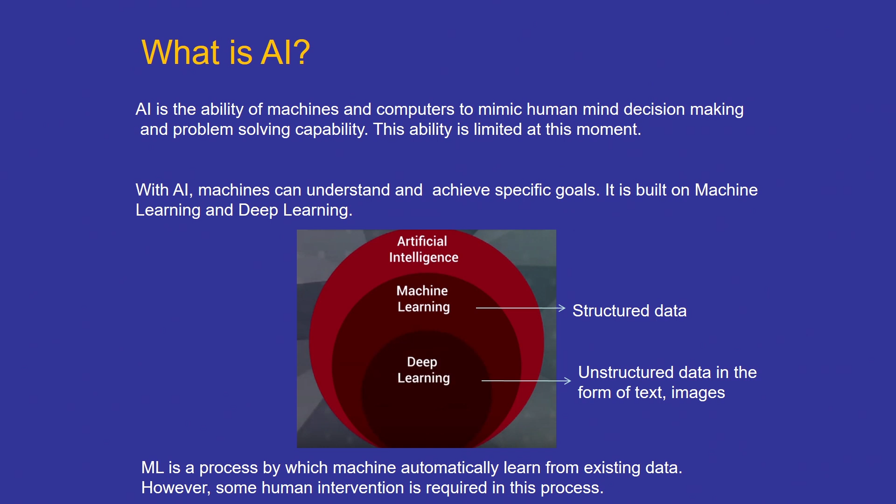Machine learning uses structured data and deep learning uses unstructured data, which we will discuss a lot in the different parts of this course. Whatever AI we use today is only narrow AI, that is, it can only do specific tasks, but it cannot do general tasks. That means general AI is still a dream to achieve, it is a concept, and it is still not close to whatever we can even think of.

AI routinely does speech recognition, as you know. I told you about customer service; AI can answer customer service questions or even provide recommendations. AI uses computer vision a lot. In a mobile phone you have Google Lens, and that actually uses computer vision. You take a photograph and then you can detect the type of flower, the type of fruit, or what kind of faces. If Google has all the databases, it can easily detect it. So, that is nothing but the use of computer vision.

Universities use recommendation engines, many of them, and they are actually all based on AI. And in today's world, everybody knows about stock trading. Stock trading is also automated, thanks to AI. But why is it important for material science? That is the basic purpose of this course.

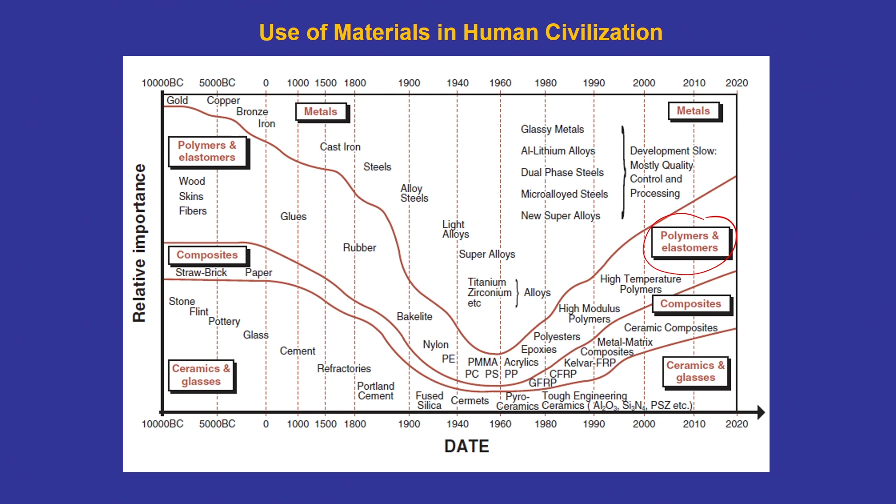In those days, metals and polymers were not widely used. Metals could have been used, but they didn't use them. It was wood basically, which was naturally available. So, you can see till about last century we were using wood, a naturally available material, for various kinds of instruments.

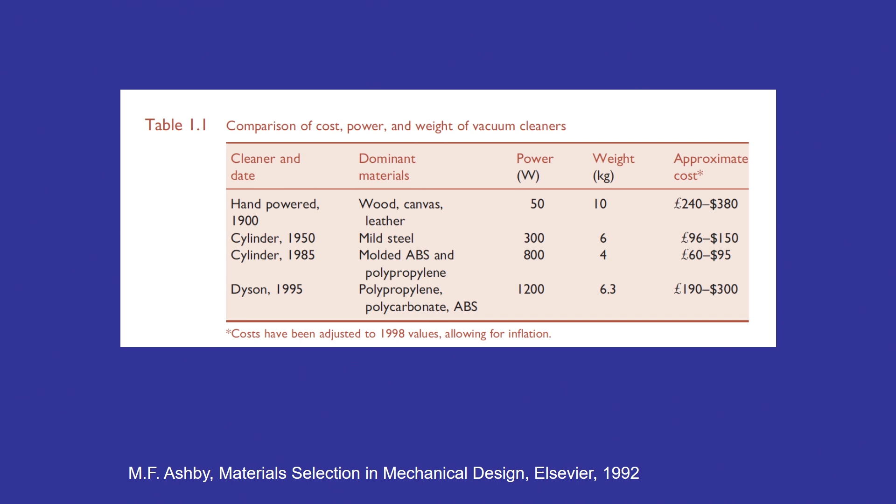So, the choice of material depends on time and the design of the product, how you want it. Another important aspect you could have seen is that the aesthetics of the products are also very important when you design something. So, therefore, these design parameters were basically used manually to get this kind of product.

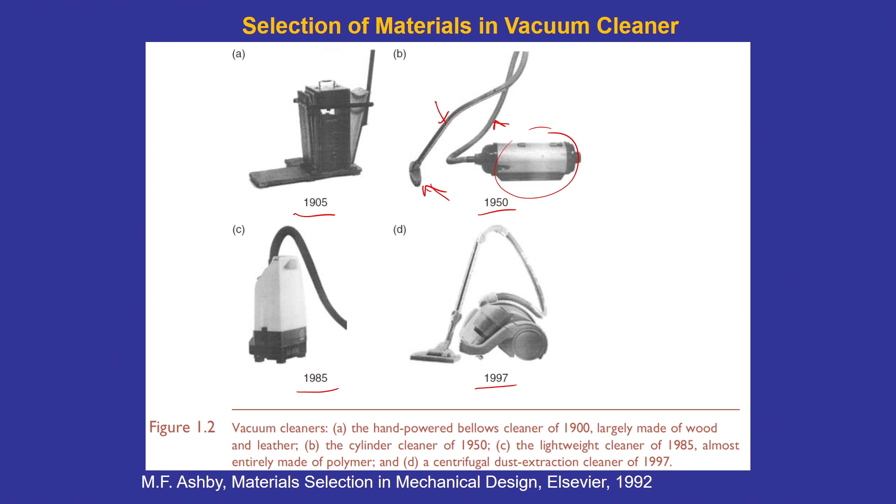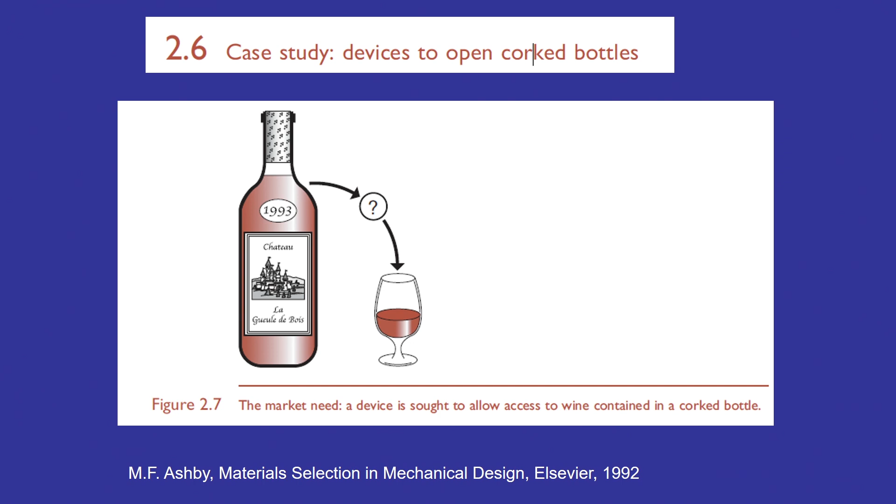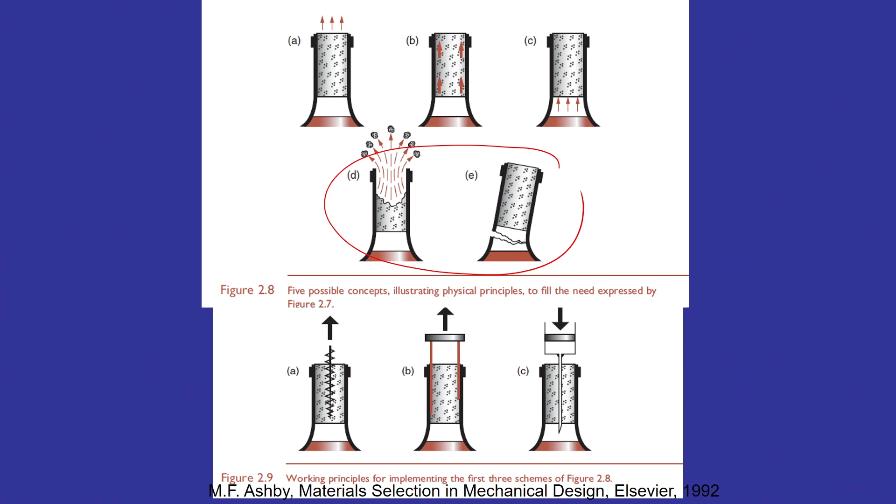So, now this one I showed you, the case study in the last class. A device to open a corked bottle. If you want to take out a liquid from the corked bottle, you have to open the cork. And what did I show you? Do not use these, these are accidents. Either you can break it, obviously any bottle can be broken by hitting it, or you can have an explosion on the top side, that is also possible, or you can put some acid to corrode the cork, but I doubt it, many acids do not corrode the cork. So, the best way is to remove this cork by putting a screw or a blade inside it. That is what is shown here.

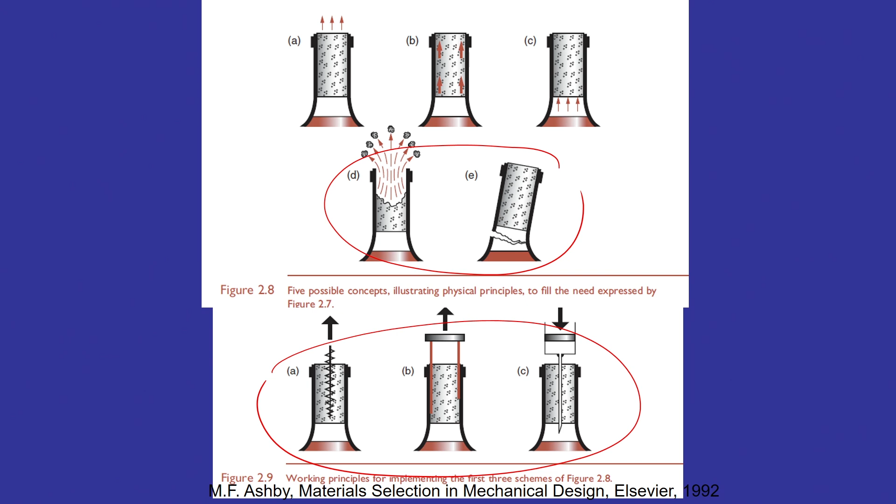So, the selection of the material for the device changes if you want to use a screw or something. This screw always remains metallic, you can't change it because it has to be hard, but the other things, whether you are using a spring assisted pull or a gear lever or a direct pull or other kinds of things, will dictate what kind of material you need to choose. So, design of this kind of device requires selection of materials, that is what I am talking about.

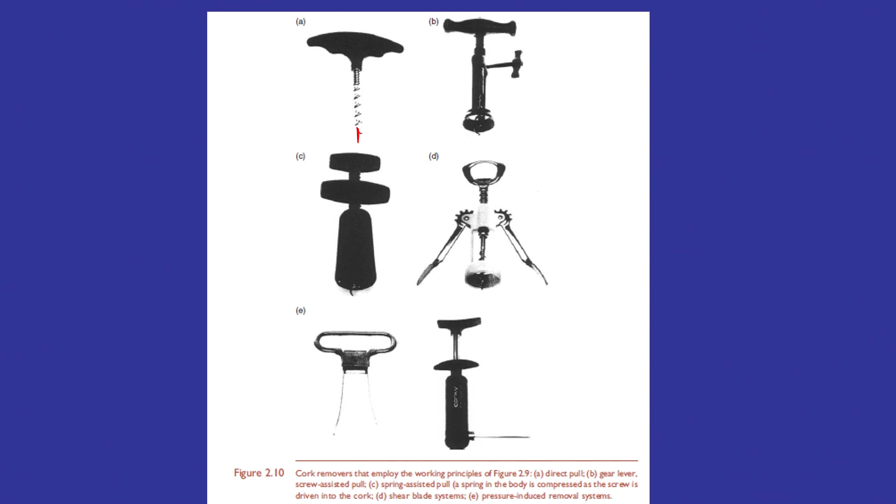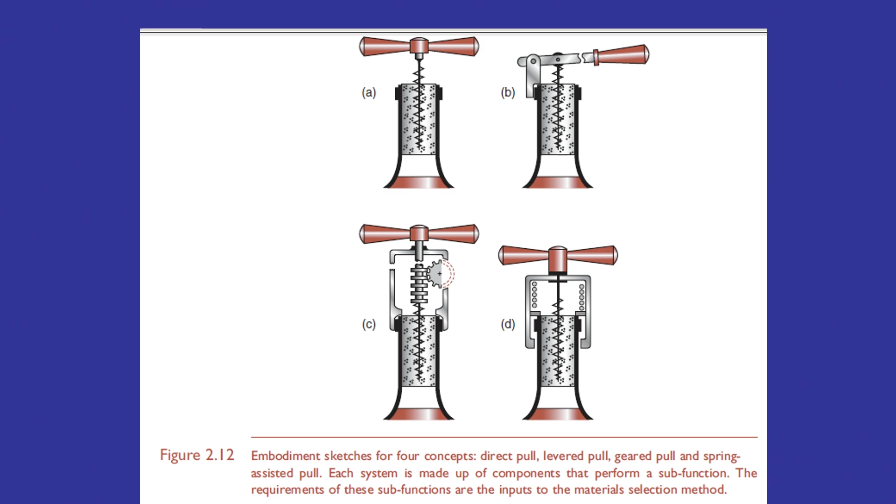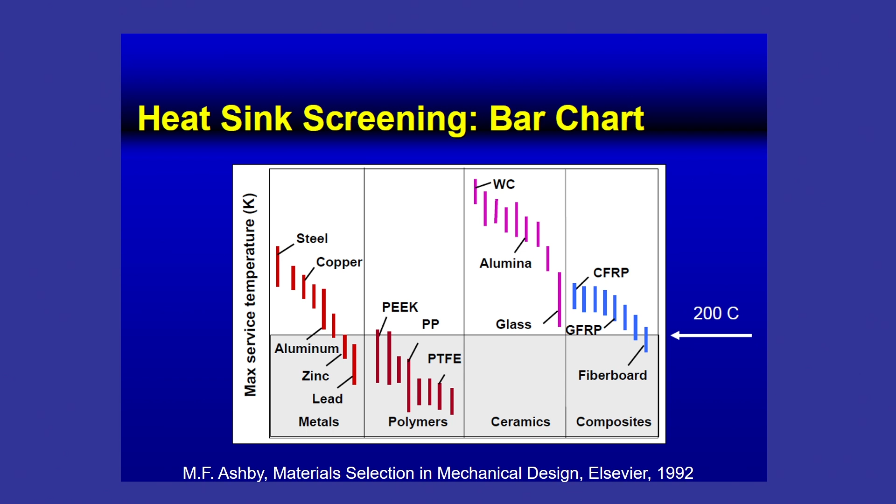So, these are the 4 things I showed you. Please go through this literature, this book is available, you can read it through, a very interesting one, and design is very important. This one I also showed you, again taken from Michael Ashby's book. This is basically a heat sink, and I showed you why we have to use mostly metals rather than polymers for heat sink material, so that it can withstand about 200 degrees Celsius temperature. Well, I will talk about another new example now.

You have seen probably high tension cables, right, because that is what is used to hang high current capacity, high voltage cables, as you must have seen in various villages or even near the cities. So, have you ever thought about what kind of materials will be used for overhead transmission lines? Obviously, you have a limited choice because you have to have a material which can conduct electricity. That means it should have very low resistivity or rather very high conductivity.

But you always like to increase the span between the two high tension structures, and they are very expensive to make. The steel structures to be fixed on the ground are very expensive to make. Also, they are going to occupy some space on the ground. So, therefore, the idea is to create as long a span as possible. But if you have a long span, the weight of the wire will be sufficiently high to allow it to sag or bend. On its weight it will fall, and it might be very dangerous, because if it sags quite low, some person may get affected by this.

So, obviously the material should be strong. That means it should have a strength of more than 80 MPa, megapascals. So, that limits your choices. Therefore, you have to have a minimum electric resistivity, you have to have a span well defined, and you have to have a material whose strength is more than 80 MPa. These conditions are imposed. What choices do you have?

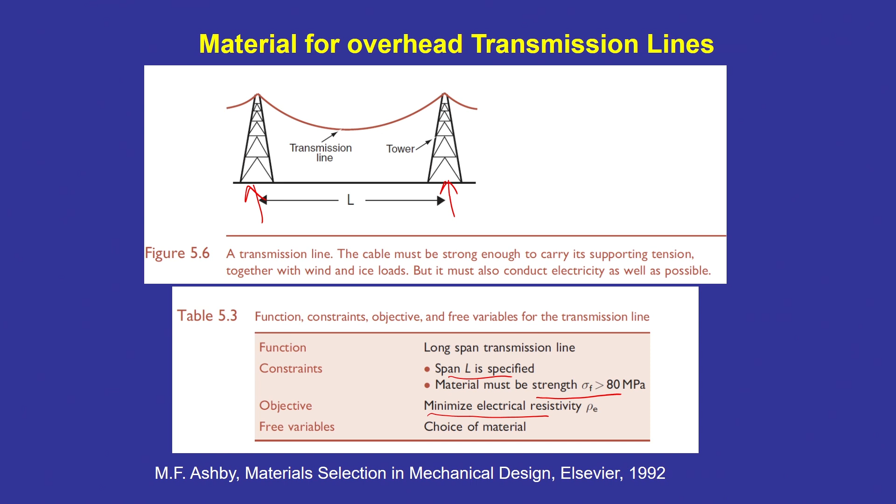So, if you put it together, this is the resistivity or conductivity plot; you can see here thermal conductivity and resistivity. Resistivity should be as low as possible, something less than this value, right? And your choices are very limited, they must be metals only, because strength is also very high. That is why we use copper wires. Copper is the best choice out of all this. You can use aluminum also, but aluminum has a problem of impurities, so conductivity will be compromised. That is why high purity copper wires are used.

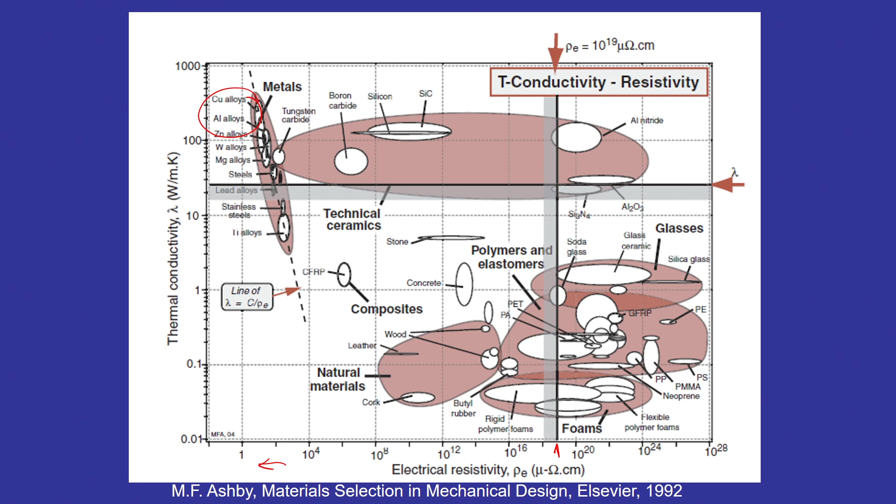Actually, you must be knowing that in electrical applications, electrical wires are mostly made of copper. You cannot replace it because of its high electrical and thermal conductivity. It can conduct electricity very nicely, and if at all there is resistive heating, the heat can be easily taken away. So, that is why it is the choice. So, after giving all these examples, which you can always read more about in Michael Ashby's book, how design of materials or objects can be done, and based on the design how the selection of material can be done. So, what is the problem statement?

Finding a new material with target properties is of tremendous importance for technological development in fields like energy, national security, resilient structures, human welfare, or rather everything in this world. Finding new materials with the target properties is the main concern. If you want to send a rover onto Martian soil, or onto the moon's surface, what kind of target properties are required, and based on the target properties can we design new materials?

So, the classical approach of material discovery is primarily based on trial and error, and it depends on a large number of costly and time-taking experiments. The moment you try and find out, you are going to make a lot of mistakes, learn from the mistakes and design it. That is going to be very costly and time consuming. And in today's world, you do not have that much time available. Normally, the material cycle from discovery to application is about 25 years, and that is very long according to many countries.

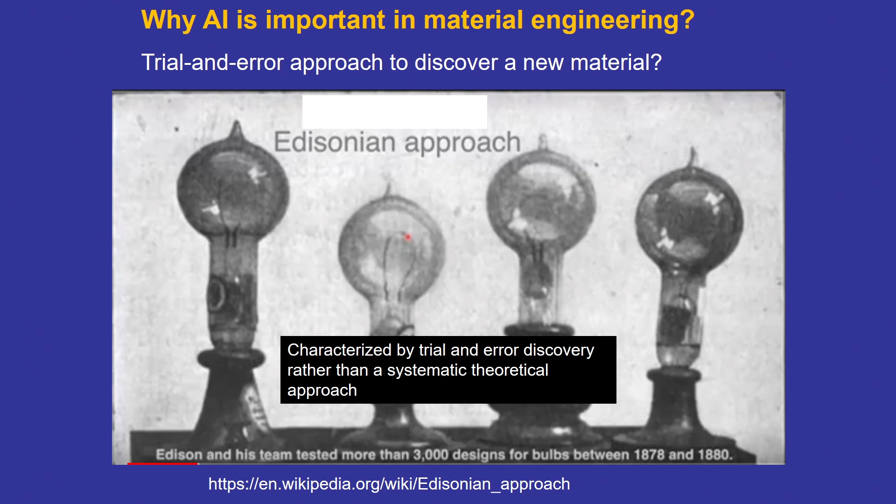But the Edisonian approach always dealt with the problem of failure. There will be a lot of failures and you are going to learn from failures. That is why it is not recommended nowadays. But then how to discover materials? One of the ways is intuition based discovery. Intuition means it is not based on any strong scientific foundations.

It can be synthesis of material or synthesis preparation, it can be some test you do like a mechanical test or a test of any functional properties, electrical conductivity, thermal conductivity, or you can test it under certain conditions and find out. Based on that, either you can choose the correct one or you can discard the wrong one. Okay? That is the intuition based. That is not trial and error.

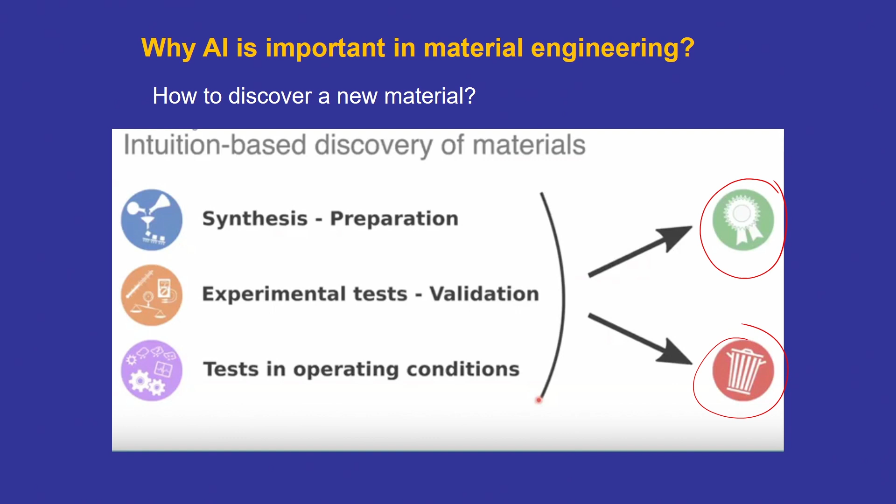Trial and error has no intuition. You simply have a certain kind of design in your mind, make it and test it. It does not work, again change the design. This does not work, again you change something else. Here that is not the case, it is basically intuition based. It is more like you think over a lot and then get some idea which is probable to work, and in many cases this actually works, because our intuitions happen to be quite useful.

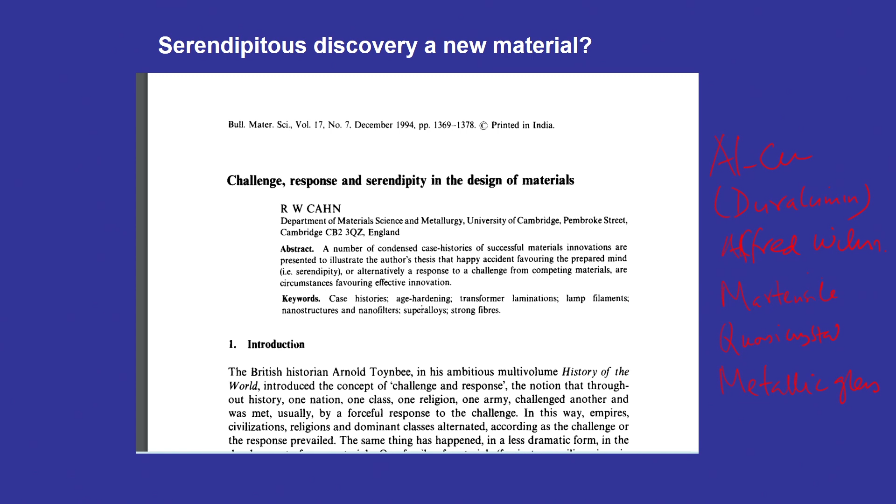Martensite is a serendipitous discovery. I can't keep on listing them. Quasi-crystal is a serendipitous discovery. Martensite was discovered by Adolf Martens, that is why. Quasi-crystal discovered by Dan Shechtman, and similarly metallic glass by Pol Duwez. So, there are many actually, I do not want to list all of them, it will be a very large list. In material science, serendipitous discovery is very high.

Let us talk about this one which we left behind. You know, this is basically glass ceramic. There is a ceramic material in which you have a glassy phase along with some nanocrystals, discovered by Dr. Stookey in 1953. And how was it discovered? The furnace was not working properly, that is how it was discovered. So, it has been told to me, and I was looking at various literature, trying to find out what it is.

You know, this person, Dr. Donald Stookey, actually did his PhD from MIT, and then he was working as a glass research chemist in some company. And then what happened? He was doing experiments, and one fine day the furnace malfunctioned, and then he discovered that there are some crystals in the glassy phase of the ceramic. That is how the glass ceramic was discovered. If you are lucky, you can discover this also.

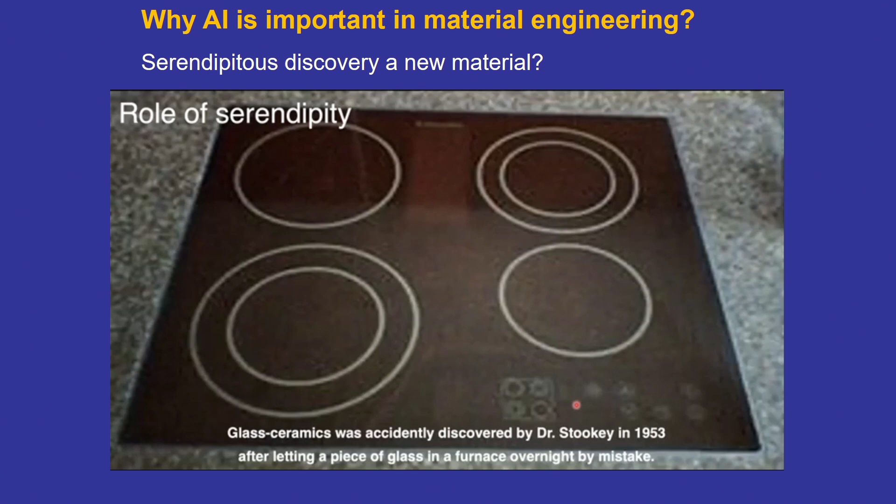There are many things you can discover, but obviously serendipitous discovery cannot happen every day. It happens sometimes. There are few reports. So, as you can understand, this is another way of discovering material. The first one was obviously trial and error, then intuition based, then serendipitous discovery. What else is possible in this world? Can you think about it? Well, let us talk a little bit more on these aspects in the next lecture. I will start from these aspects.